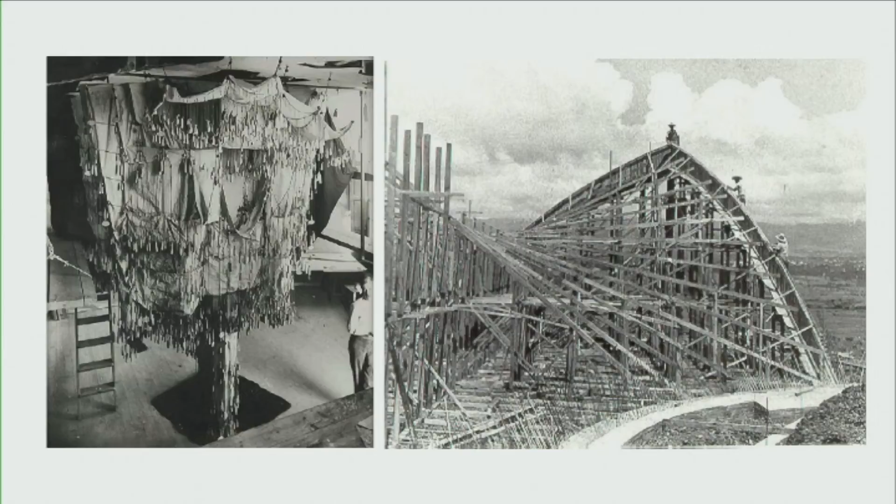So this idea of the impossible for me really starts with these two images. On the left is Gaudí's hanging chain model. The fascinating thing is Gaudí had an idea in his head, a vision, but he didn't quite understand how to describe or communicate it. If you approached it from a traditional architectural standpoint, you'd draw plans, sections, renderings by hand. But his vision didn't align with those methods, so he had to invent something. That's the ingenuity of design and architecture: you've got an idea, and you have to invent the way to document and communicate it.

The same holds true for Felix Candela in his hyperbolic structures. The beauty of that form is the method of construction that goes into the process. All of the ruling lines that define the geometry are actually the lines constructing the building. Very powerful stuff, this idea of a vision and how to begin communicating it.

Early in my career, as a young architect, I started out drafting by hand, ink on Mylar. At the end of an 8 to 12 hour day, your fingers would be covered with ink, sometimes for weeks. That's how people knew you were an architect—you'd meet people socially, they'd look at your hands, and realize it.

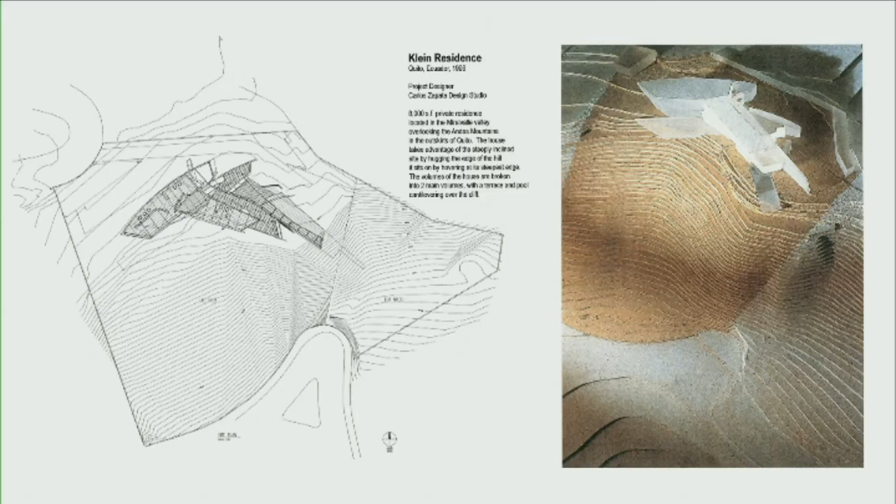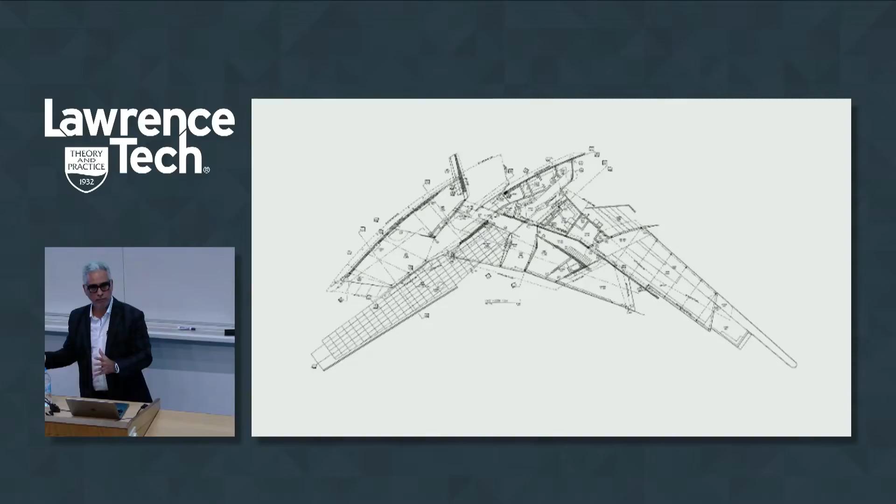But the interesting thing was the pace of the work. It was slow, it was deliberate. We took time to cut the contour lines of that model, to draw the plan, to build the adjacencies and the program, and to really visualize this in a way that today, with our tools and technologies, is fairly easy. So I want you to think about what we're losing from this process as we gain technological prowess.

So, a lot of physical models. This model was actually, in a lot of ways, our BIM back then—it was used in the field for construction. The tradesmen had to verify the measurements on this physical model. And this model was pretty huge, about twice the size of this table.

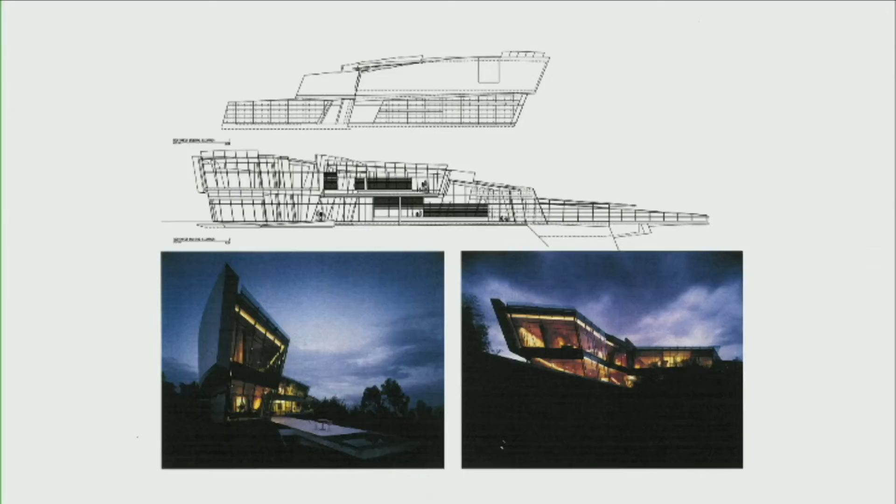But the project gets built, and that's always the exciting thing—that moment of actualizing the design into reality. That's really been the driver for me in my career: idea to hand to form to building.

In doing so, we had to come up with ways to represent these geometries. Here's a simple example of this staircase, where we had to do multiple cut lines to define the dimensions of the design. As a young architect, you could imagine sitting there drawing these things for hours, thinking, God, there's got to be a better way.

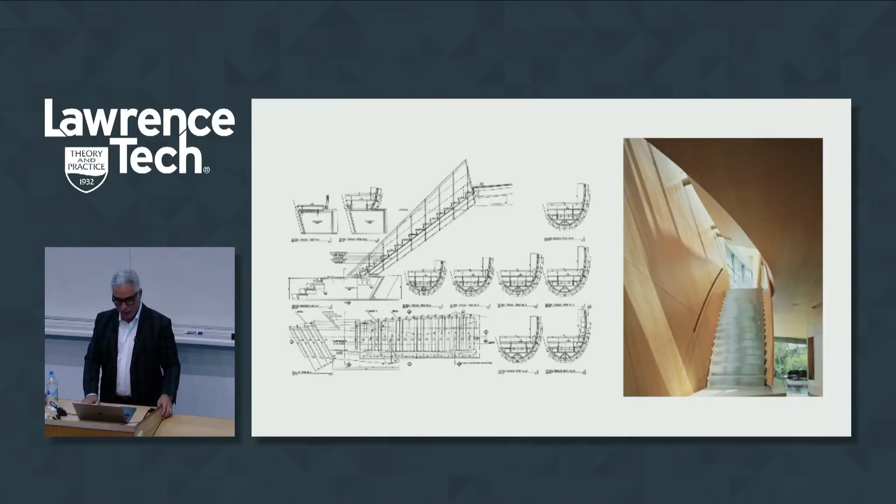That was the impetus for me to start thinking about new ways of working, designing, and using tools in a more direct way. That's what brought me to MIT, where the theme was really about new tools. I remember Carl walking in at 2 o'clock in the morning in the computer lab, asking me, 'Hey, what toy are you working with today?' I was always looking for the next tool to test out and use—it was interesting.

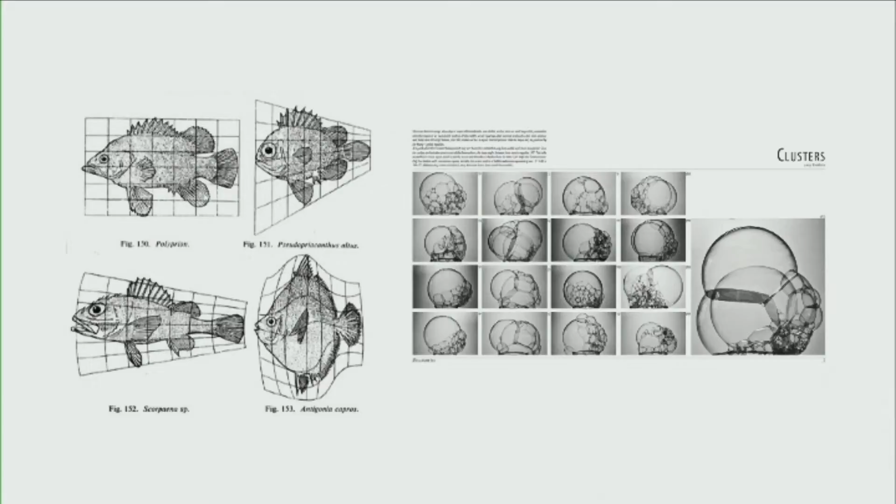But it was really about this idea of form and how we begin to think about it in different ways. On the left is the work of D'Arcy Thompson, and on the right is Frei Otto's soap bubble experiments. The idea here is figuring out new ways and methods to come up with form.

I was introduced to the computer in a different way, and began to look at simple things like how you take a sphere and morph it into a different shape, and what that implies in the design process. I began to look at Maya, Rhino, and other tools starting to come into the market that implied a different way of looking at architecture.

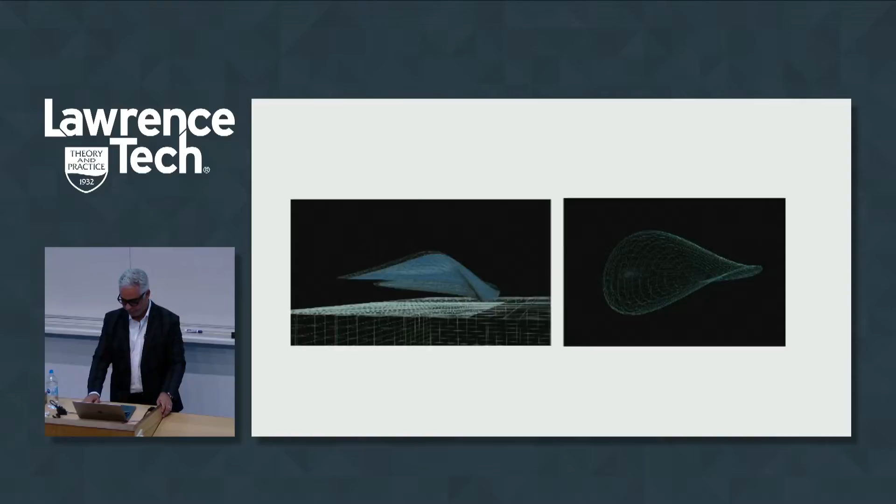That took me, for my first professional job as an architect, to work in an office implementing some of these strategies. The first project I worked on when I joined Morphosis was the San Francisco Federal Building. It was a design competition that Morphosis was awarded, and the whole process was really about the facade and the veil covering the building.

It was a building that was also going to be responsive to the environment. It had operable windows tied to the National Oceanic and Atmospheric Administration, which tracked the weather nationally and communicated back to the building. So the building was constantly moving and responding to the weather conditions.

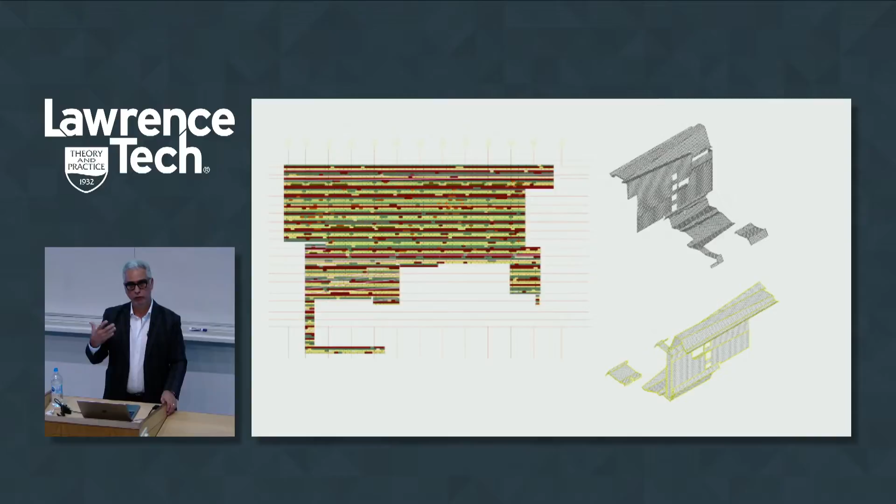So my job was really to look at that facade in a more integrated and systematic way, and how do we begin to document this for fabrication purposes? Coming up with simple ideas of how to use the computer to generate a strategy or method that we could then use to model.

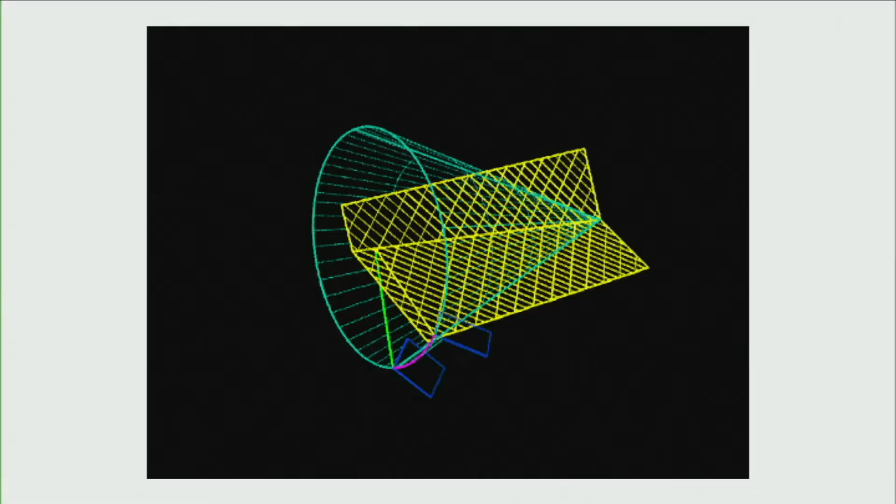569 varying panels with different folds at different conditions, then putting that into a production process in the computer so we can generate the documentation for it. Here's some examples of the model as it was for construction purposes.

The beauty here was that we were able to integrate multiple trades into one model so they can work more seamlessly. The facade itself had 3 different layers with 3 different vendors or trades with 3 different contracts, which created a communication challenge because those 3 components had to work together, not just geometrically, but also contractually and for construction purposes.

The next project where we further developed some of these ideas was the Eugene Federal Courthouse, where the idea was about a ribbon that wrapped around the building, encompassing a number of courtrooms.

The intent was that as these things peeled off and folded, it needed to seem as a seamless flow of metal. So again, how do we begin to document this information and integrate a lot of these ideas through the computer?

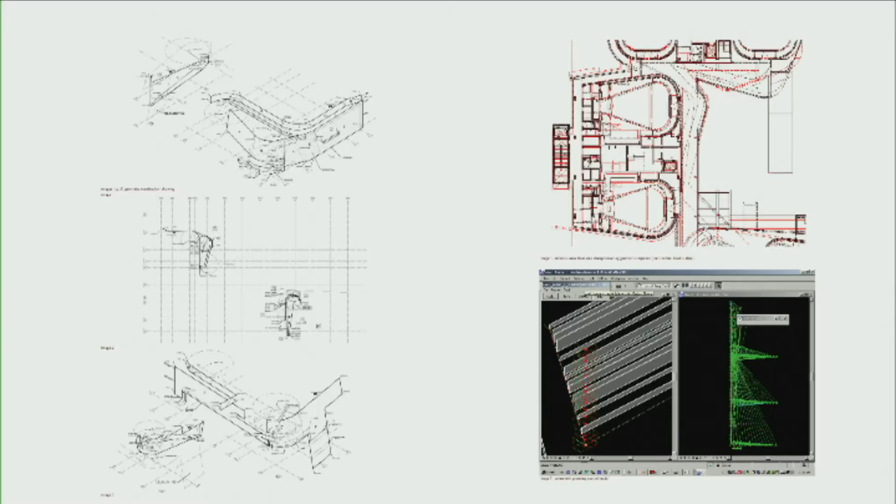We began working with Robert Aish, who was a researcher at Bentley at the time. We were using Bentley Triforma, a modeling tool very similar to Revit and CATIA. But one exciting thing was that Robert Aish was starting to develop a visual programming tool called Generative Components. It's the precursor of Dynamo.

I don't know if you guys know about Dynamo or have used Dynamo in Revit, but Robert Aish basically invented the whole idea of visual programming for architecture.

So we started to use that, and it was really interesting to see the relationship between the image on the right, the little bubbles which is the narrative, and on the left, the geometry. So you've got this direct correlation between the script, the program, and the responsiveness of the form.

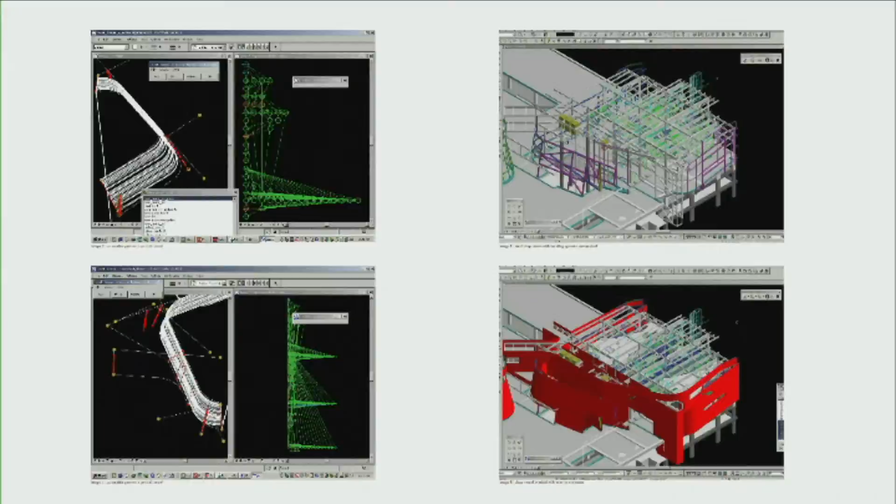And then obviously bringing that all together again into this master model process of integration. That notion of integration, you're gonna hear me say that a lot in this talk. It's a very important component in terms of how all of the different disciplines and pieces come together.

That then led me to Gehry Technologies. While at MIT, Frank Gehry was commissioned to build the Stata Center, the School of Computer Science at MIT. While he was there, he and his partner Jim Glymph conducted a number of studios and workshops, and I was able to work with them on some of those studios and got to know them, got to know Jim Glymph really well.

So my goal at that point was I wanted to go and work with Jim Glymph. He was, at the time I think, the only architect talking about technology in a completely different way. So it was really exciting when I got the news while I was at Morphosis.

It was interesting because Morphosis and Gehry's office were literally just around the corner in Santa Monica, Cloverfield and Colorado. Lunchtime was hilarious because we'd all meet at that corner, and the Gehry guys and the Morphosis guys would all go to lunch together, and we were all friends and talked to each other.

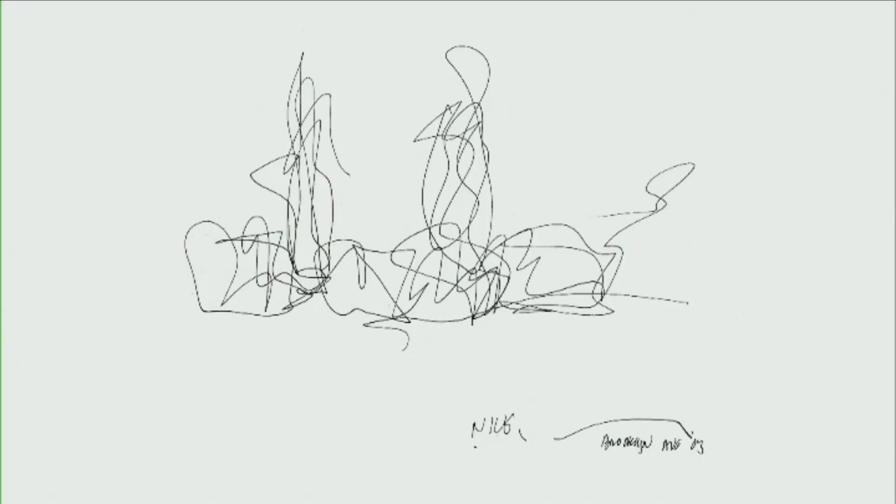How do you take a sketch, a gesture from an idea like this from Frank, and begin to develop a whole process of design that leads you towards the resolution of the project? What people don't understand about Gehry is that he's very disciplined in how he works through his design process. People think the form comes first. Actually not—it was the program blocks that began to form the body of the building. Until that was dialed in, Frank would then begin to do the gestural moves on the skin. But this was a very important piece of the process.

Lots of iteration, lots of physical models, and then eventually the final design model—the master model, if you will—that would then become the template for the basis of production.

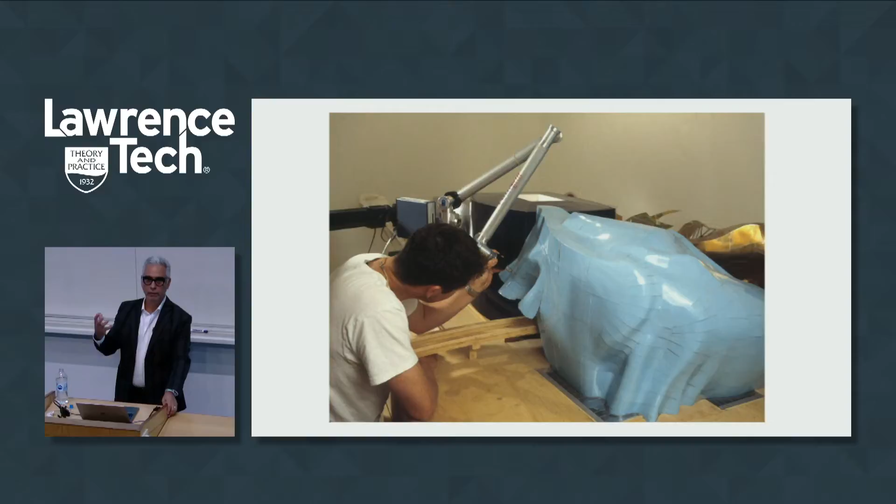And so here you have the digitizing arm collecting all these points to begin to document that design, so that we could then take that into CATIA to start developing all the detailing and the engineering for the construction.

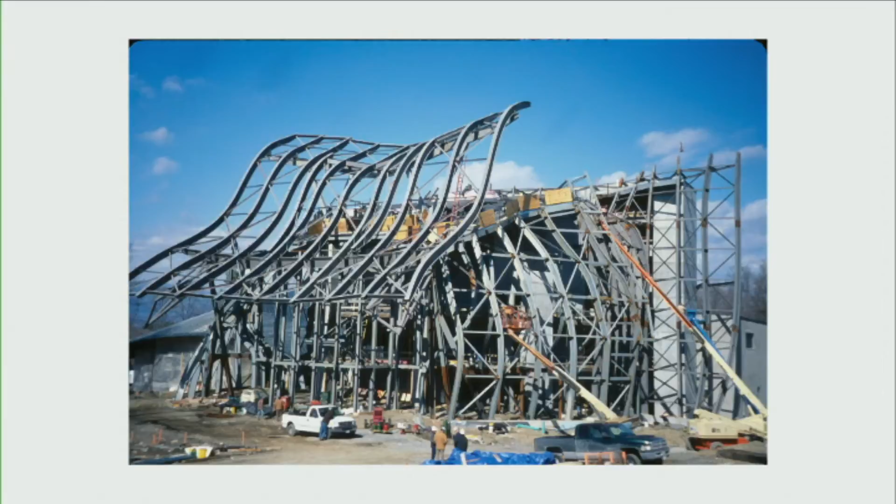It's very simple—it's going from sketch to a computer model in a very rigorous way. And we learned how to do that in Frank's projects very effectively.

And as we saw, the Disney Concert Hall was like the little cousin of Bilbao in a lot of ways, because a lot of the ideas generated for this project came from that.

So Gehry Technologies—it was an interesting group of people, architects, computer programmers. We put together a very diverse, multidisciplinary, creative group of technologists, scientists, programmers, and engineers, and I believe it became the first, or the model, if you will, for the BIM service business.

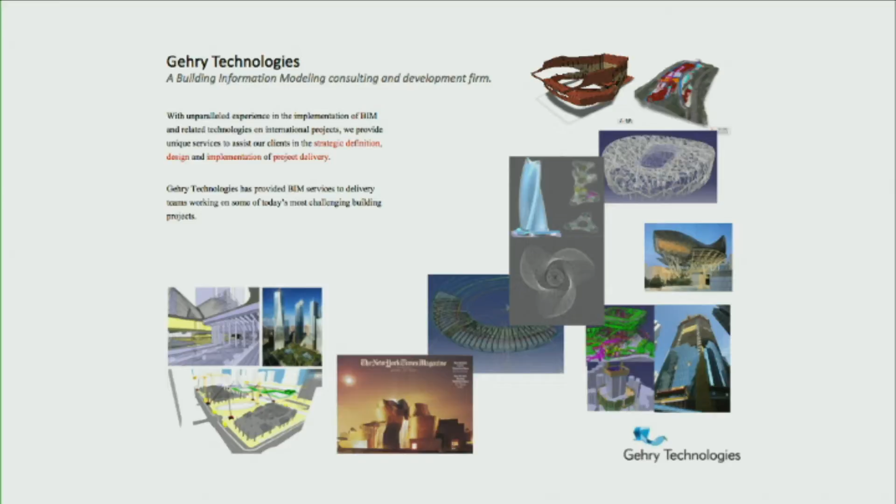After Gehry Technologies, a lot of companies began to do the same thing. One in particular, a group out of New York called CASE, was probably one of the most successful that grew out of that, and just recently got bought out by WeWorks. So now WeWorks has an internal group that is literally driving the delivery, design, and integration of their projects, which I think is pretty brilliant.

But the whole focus of Gehry Technologies was, now that we've done this on Gehry projects, how can we begin to provide this service to others? So we went out to the world and began to provide services to the younger architects who were up and coming—the Zaha Hadids, the Herzog and de Meurons, the Hani Rashids—who had ideas and visions but didn't yet have the methods or processes to execute them. That was an exciting moment in my career, where we could begin to share this knowledge across the industry.

One of the mantras we had—and it was actually Frank who came up with it—was that his whole drive in doing this was to transform the industry. He wanted to give power back to the architect, give control to the architect. He always said that he or she who owns the information has the power. And that holds true today. I think that is a really important thing to keep in mind as you think about technology.

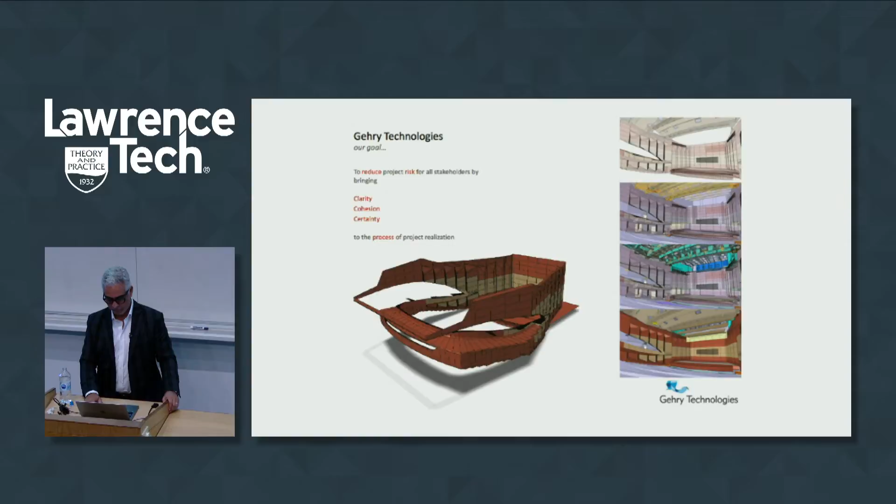So here's a project that, in my opinion, is probably the pinnacle of this whole integration of building information modeling and computational design, where a lot of these ideas culminated in a very beautiful, productive, and effective way. This is the Louis Vuitton Museum in Paris.

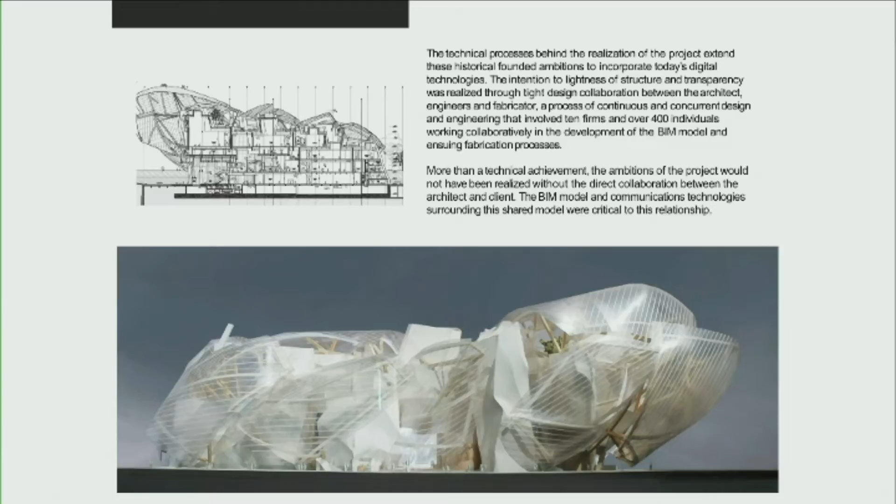But the thing I really wanted to focus on was more about the process—how we were able to combine the parametric modeling we were doing with new ideas of collaboration and new tools, really coming up with a structured way for collaboration. Nobody had done this before. There wasn't a Navisworks or a BIM 360 or anything like that at the time.

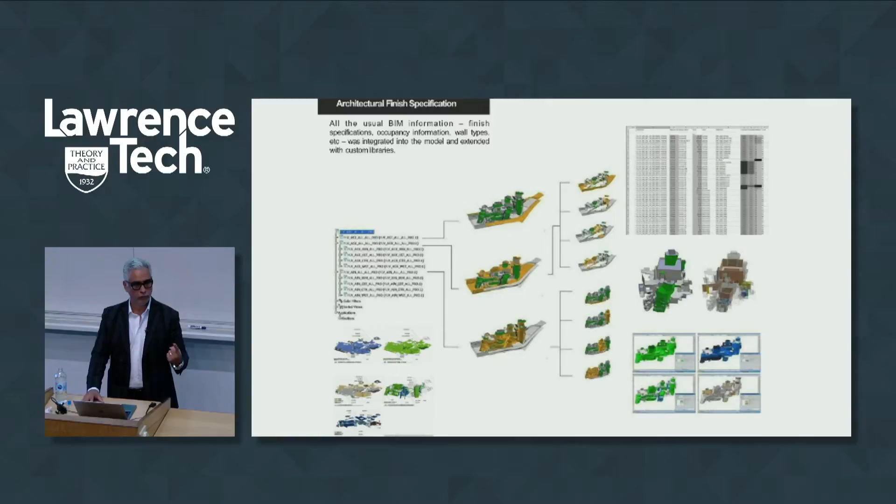So we literally had to begin to think about really simple things like interoperability. Everybody's using different tools, everybody's using their own methods—how do we begin to bring these things together effectively? How do we begin to think about all the different scopes of work as different components that need to come together in a way that brings all this information into one single source of truth, being the information in the model.

So what you see here is us basically attributing that information in a way that we could then effectively schedule from it, estimate from it, and integrate from it.

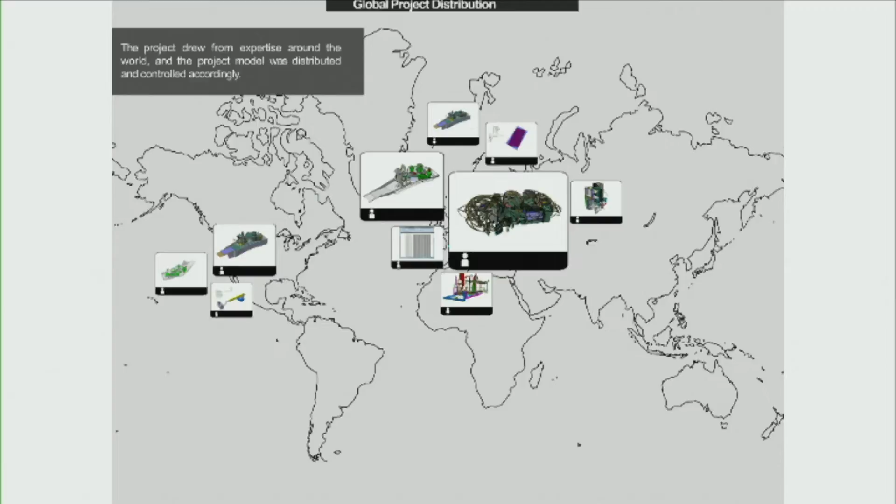And so we had to create literally an intranet, if you will, of the project, because we had consultants throughout the whole world working at different time zones and geographic locations. So we developed our own model server where the centralized information was constantly being updated, so everyone had concurrent real-time data of the project. And then we created a tiered access to that information depending on your role and your persona.

And then, again, how do we then interchange this information and exchange it with everyone? We had to come up with a method of doing that. We were inventing literally a way to collaborate through the model.

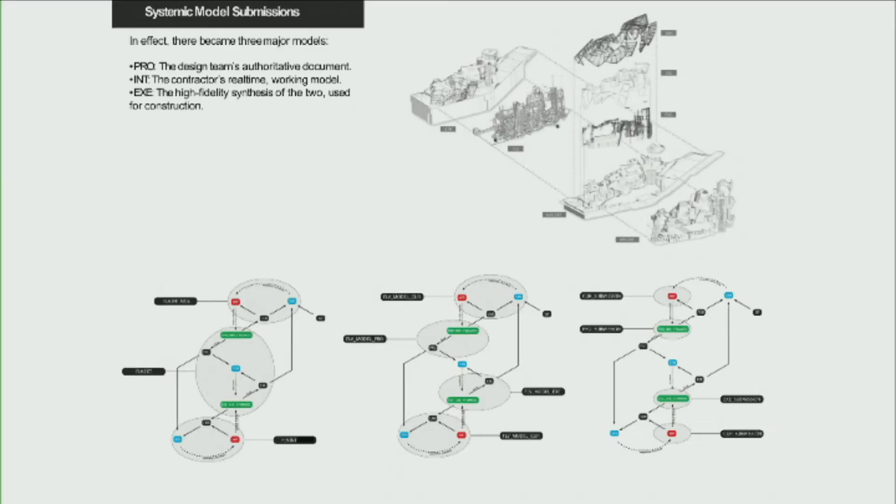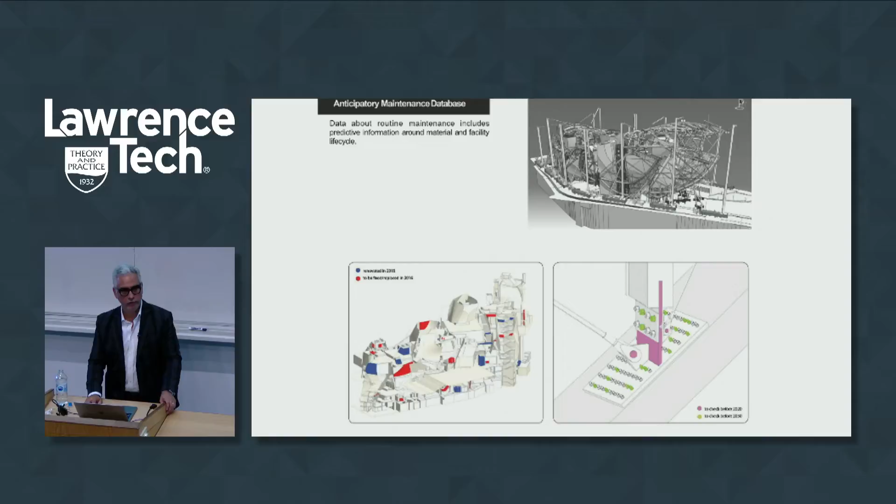Data aggregation, data distribution, how do we then leverage this for other functions like visitors, security? There's a lot of information being captured and knowledge. The important thing was how to democratize that and share it with others, and maintain a database as well. So this model now really becomes more than just a representation of the design.

So I'm going to kind of go quickly through this. Are you guys okay? Everybody with me so far? Not getting sleepy? I know it's late in the day.

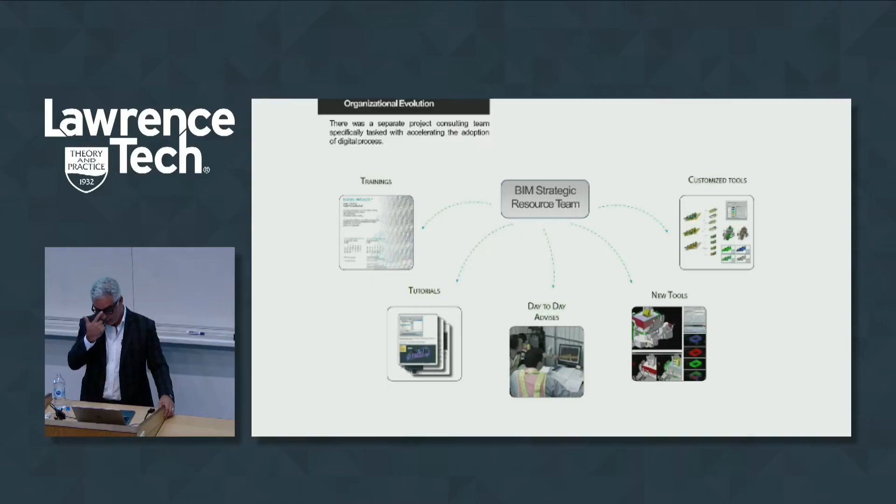Part of this too is the training. You have to train people. Nobody knew how to do this. So not only did we have to execute and implement, we actually had to introduce a whole project team to a whole new way of working, new tools, new processes, and constantly updating the guidelines and standards so that everyone kept focused and on track.

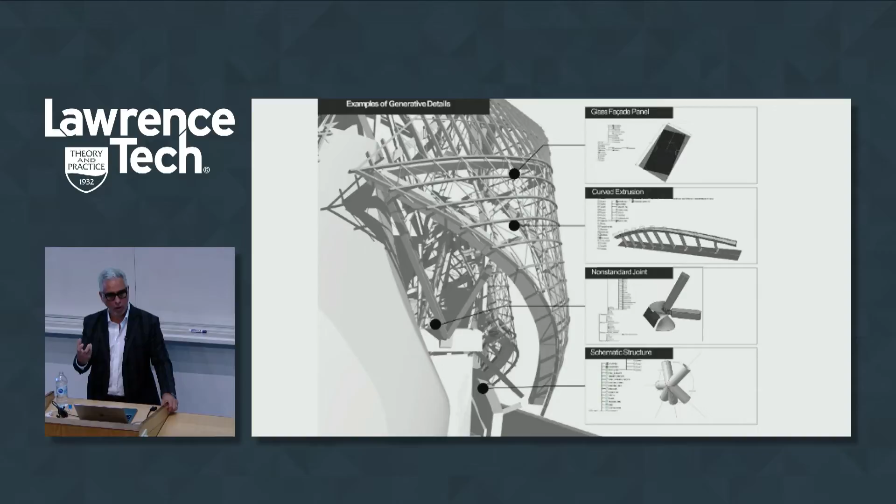And then generating a lot of intelligence in the componentry and in the development of the design. These are very unique conditions that varied from joint to joint. Capturing that knowledge in a parametric model and then being able to deploy that effectively, and then rationalizing that for fabrication, going straight from digital to the factory.

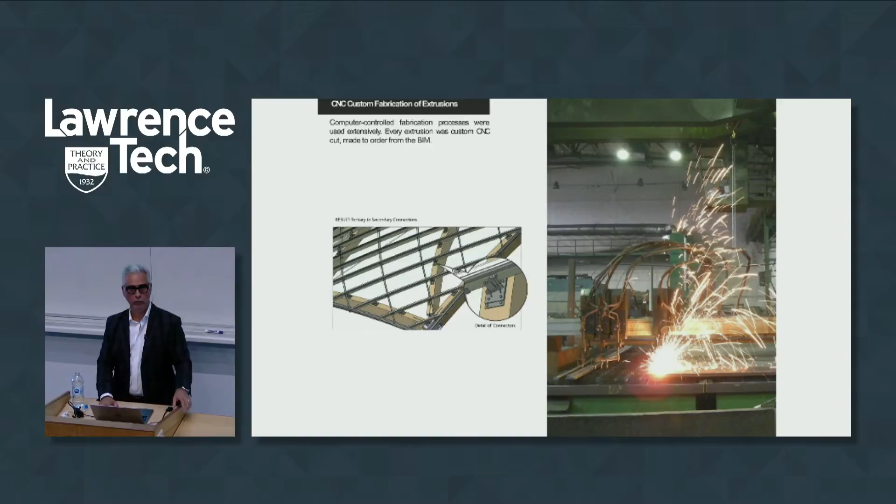And then optimizing the material. One of the challenges we had was how to make a complex curved building economical. So what we had to devise was a way to generate these curves from a single curved surface, meaning conical. If you can just bend glass in one direction, it's much more cost effective than if you bend it in multiple directions. So we had to devise a way to control the geometry with computation.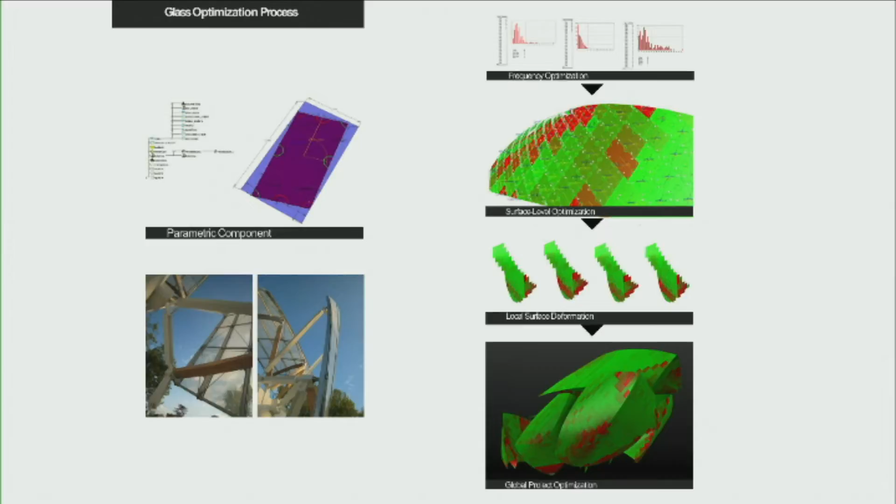So we ran this iteration multiple times so that the red would go away. And if the red didn't go away, but it was just one panel, then we could live with that. That wouldn't be the end of the world. But it was a matter of reducing that process. So here's a diagram of that workflow where you're going with the geometry all the way through the parametric definition and then the documentation.

Here's another project where we took all this knowledge to somewhere else, where you would think there's no way you can capture this level of sophistication. This is Mexico City. This is a museum where we were hired by the architect, Fernando Romero, from FR-EE, to panelize this facade with a hexagon.

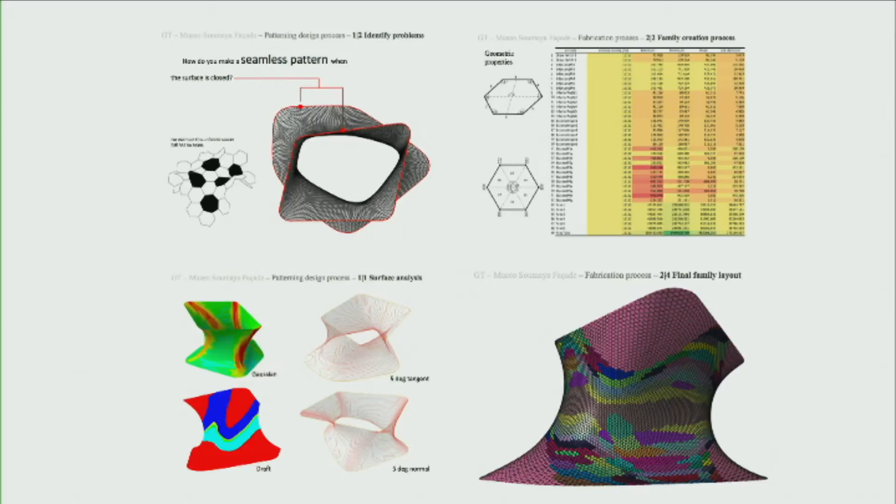The challenge he had was that he had locked the shape because he had to buy the steel early. So now he's got this shape that we can't change, and we have to panelize it with a hexagon. Initially the idea was it's got to be one hexagon pattern, which is impossible on an irrational shape. So part of the process was to educate the team on the complexity of the geometry.

So we showed how you unfold a soccer ball, and did a lot of academic exercises to show the complexity that was created here and what the challenge was. We had to write a script literally that constrained the gap to a certain dimension within a tolerance of 3 inches, and then optimize the number of families or groups we could come up with, so that we could reduce 14 variations of this panel versus 2,300. I knew this was going to happen.

Sorry about that. There we go. My apple.

So where was I? I'm sorry. The variations down—so we were able to control that and optimize that.

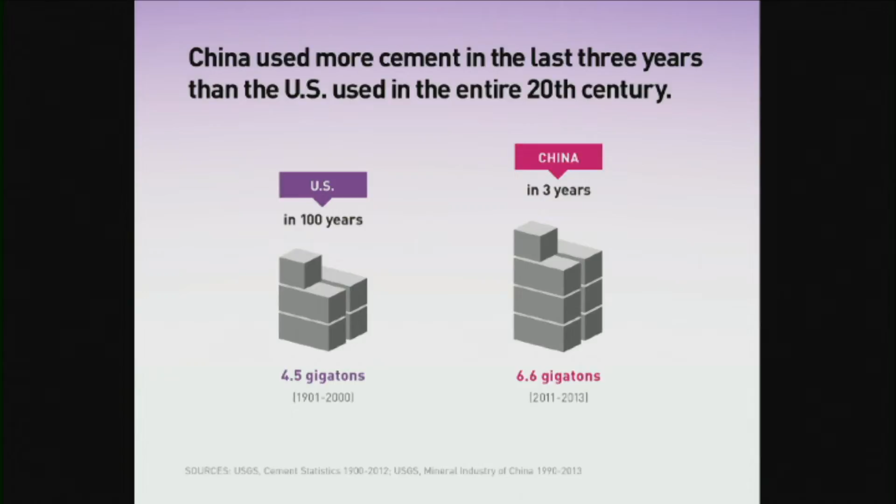This also in the face that China, and I think it's true to this day, is going through tremendous amount of growth. This data point was really interesting, and it's quite dated, but I think it's still relevant: China in 3 years actually used more cement than we did in 100 years. I mean, think about that.

I mean, we were a very complex organization. A Disney project had over 140 disciplines that needed to come together to build the project. It wasn't just the facility guys or the MEP guys or the guys that we think about in a traditional construction project. It's show designers, theme, animatronics, ride engineers. The list goes on and on and on.

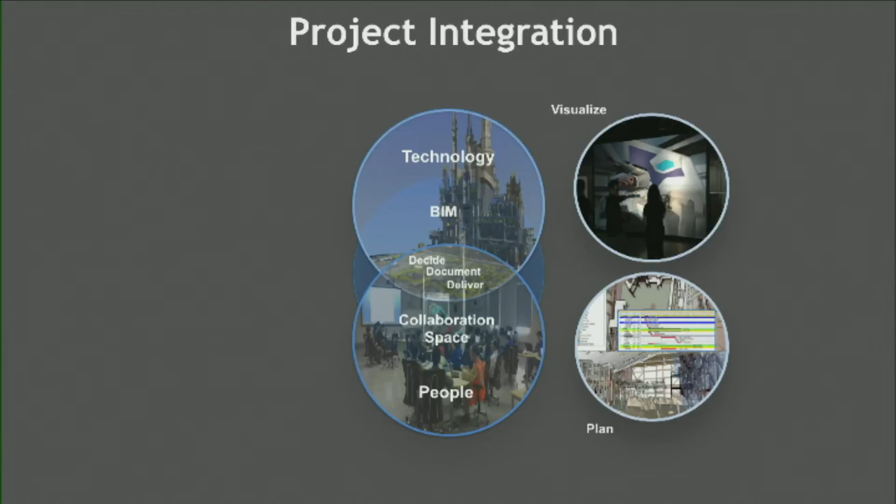We linked our schedules to the models, so we did a lot of visual planning with 4D, and then implemented that in the field—how do we take that information and begin to communicate it more directly out in the field using total stations, robotics, iPads, and then verify that everything was being built according to plan, which we did through laser scanning.

And so this was the iterative cycle, the day-to-day grind if you will, of bringing all of these pieces together to the stakeholders. The stakeholders had to come in and make decisions and tie their decisions to the model, to the schedule, to the estimate.

This is not a new idea. We actually got this from Stanford, the Center for Integrated Facility Engineering, who actually got it from JPL in Pasadena, NASA. Basically, this is how NASA launches their missions.

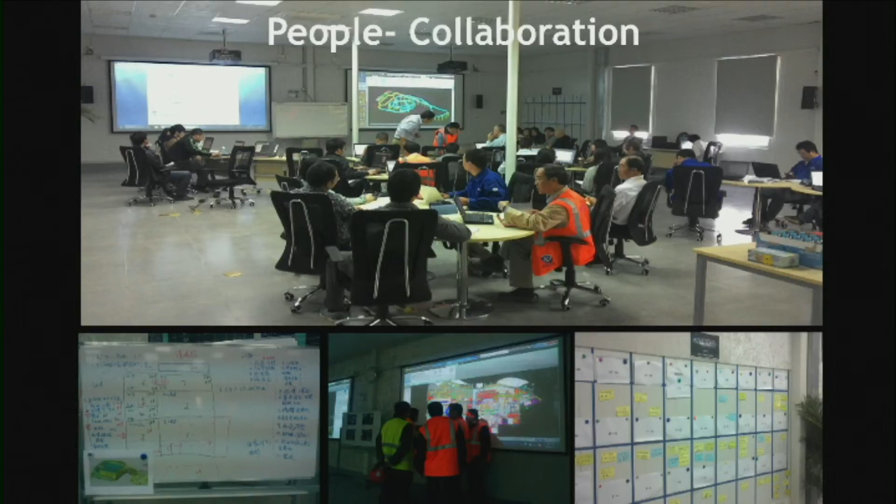They bring everybody together into a room, and they're constantly working and talking with each other, communicating, making sure that everyone's in tune with every decision that everyone is making. There's a great book out recently by a general, I forget his name, called Team of Teams. Highly recommend it. I think it's really relevant to a lot of the stuff that we're facing in construction as well as in other industries.

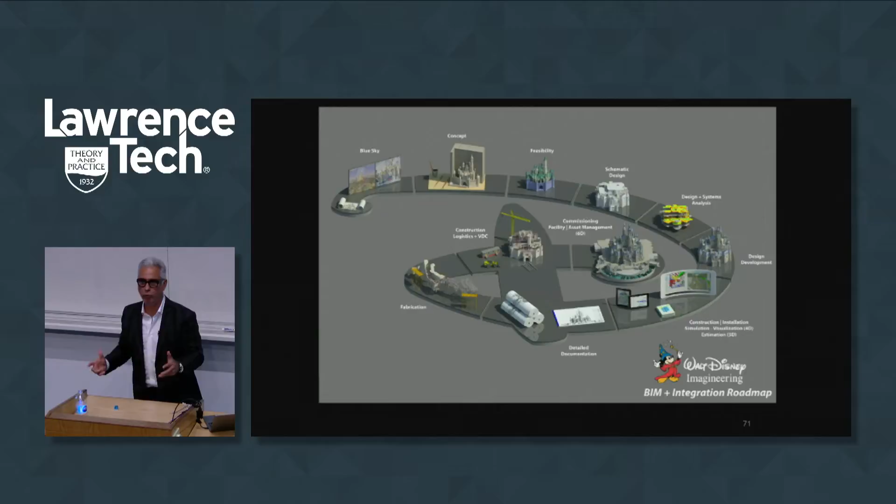And then using BIM and technology and the tools to bring all the different multidisciplinary stakeholders into one single source of truth and mapping that out into this roadmap. So from that project, we were able to then develop the roadmap that we were then going to use and implement for Walt Disney Imagineering.

And we taught the Chinese market, we taught our own people, our Imagineers. One of my initiatives was to try to get the regulatory agencies in Shanghai to understand the value of what all of this meant. And we were able to do that. They put a program, a plan, a 5 to 10 year plan where in the tourist zone where Disney sat, all projects from 2013 on that were above a certain price were going to be required to have a BIM submittal for regulatory submissions. So we educated the municipalities. We took them to Singapore to meet the Singapore government, who had been doing this for years.

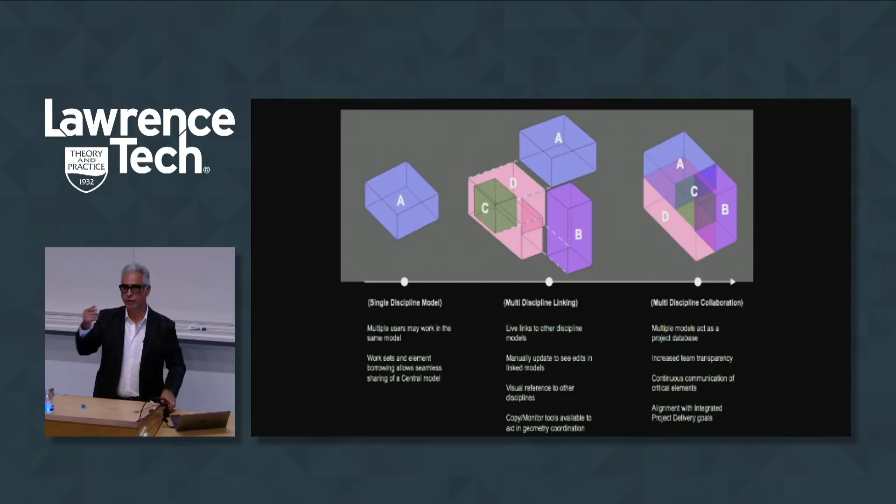They've been doing e-submissions and BIM submissions in their building departments way before anybody had even thought about this. And the reason they do it is because it's by necessity. Land is limited in Singapore, so they have a very rigorous process to make sure that their planning is done effectively.

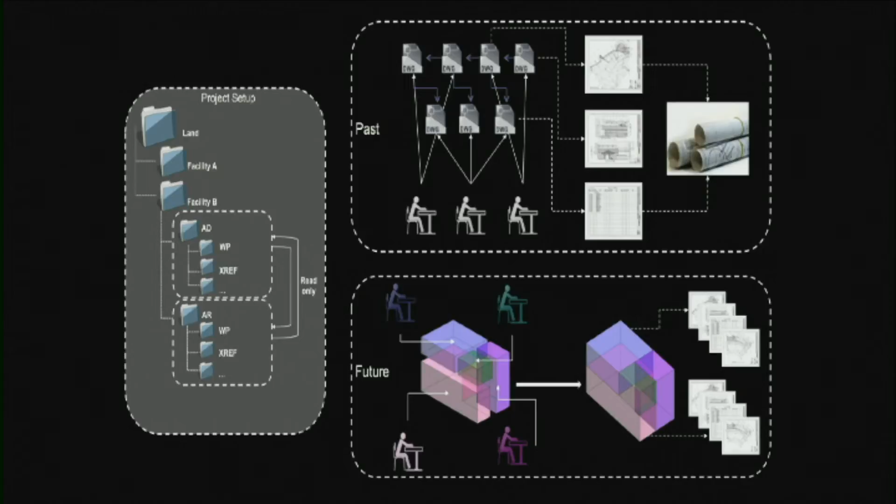So mapping out the whole BIM process, we start to organize how we organize the information, get away from a paper-based process and start thinking about this multidisciplinary 3D-based process that then outputs the 2D information, rather than having it the other way around. And then there's the level of detail as you go through different phases of the project. Blue sky for us was our conceptual phase where we're just sketching, it's just massing. And then all the way down to operations, where you've got to have the bolts and the washers and all of the information that the maintenance crew is going to need to be able to verify and maintain the facility.

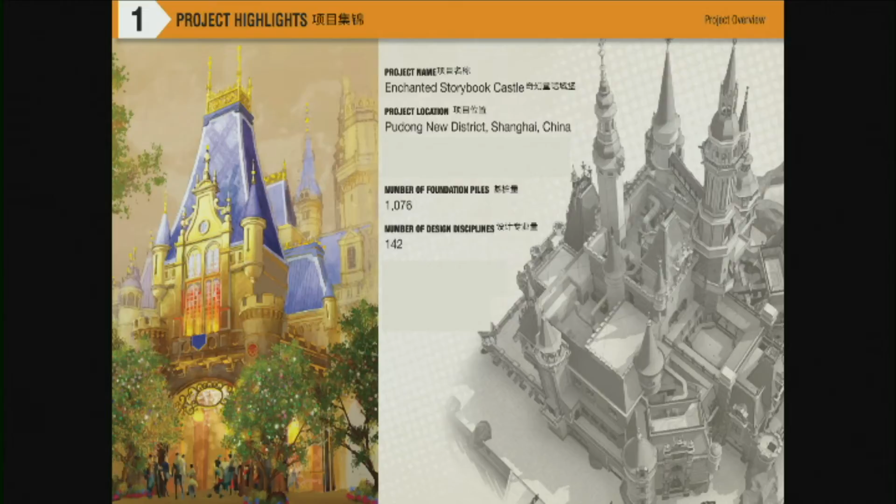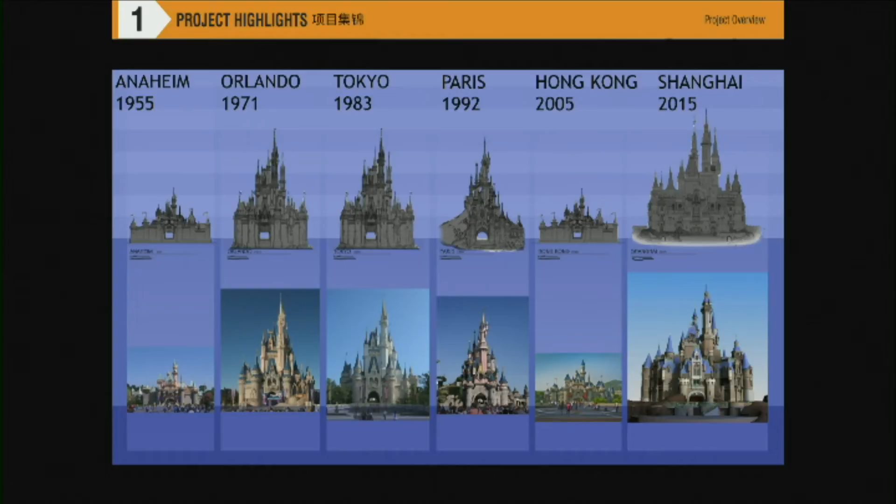So the project started out in 2D and in watercolors, in a typical 2D-centric way, and there was a lot of resistance to change. The organization had dabbled years before I arrived with Revit, and they didn't have a good experience. So I insisted that we try to use a tool that's different from just a legacy process like AutoCAD.

And we went rogue, me and this young architect, and we kind of did a parallel process behind the scenes. Got a little bit in trouble for it, but I think it paid off, because when we got the creative director of the project to stop going through the AutoCAD DWGs just to make sure that all of the information he was envisioning was correct, and instead visualize it in an authoring platform like Revit in 3D, it completely changed his perspective on the way he was working. And once you get the creative guy at Disney to support you, then all the decisions from there are quite easy.

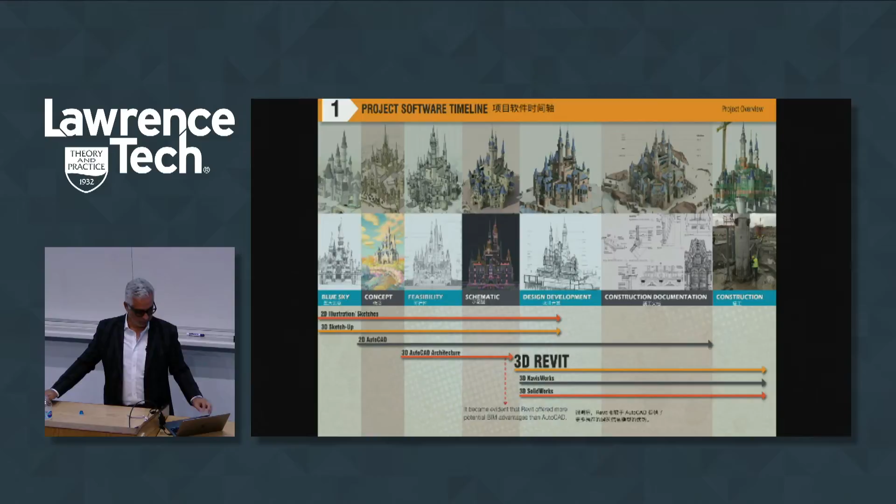One of the things that we then started doing was leveraging the power of BIM. This castle was filled with ornamentation and componentry, which is very typical of a Disney project. So we started developing a library of intelligent components that could then be attached to the project.

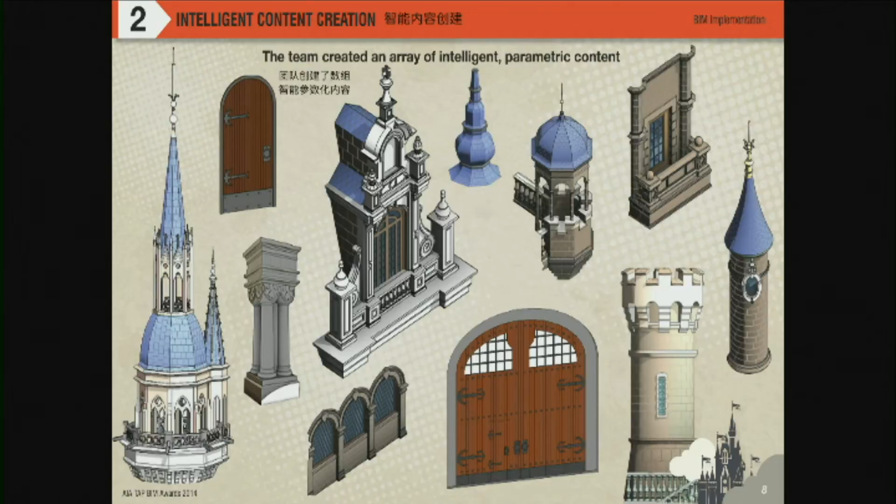That gave us the ability to kind of treat the castle as a kit of parts, right? So now we could track all these components. We can track who's building what, when are they going to be built, when are they going to be delivered.

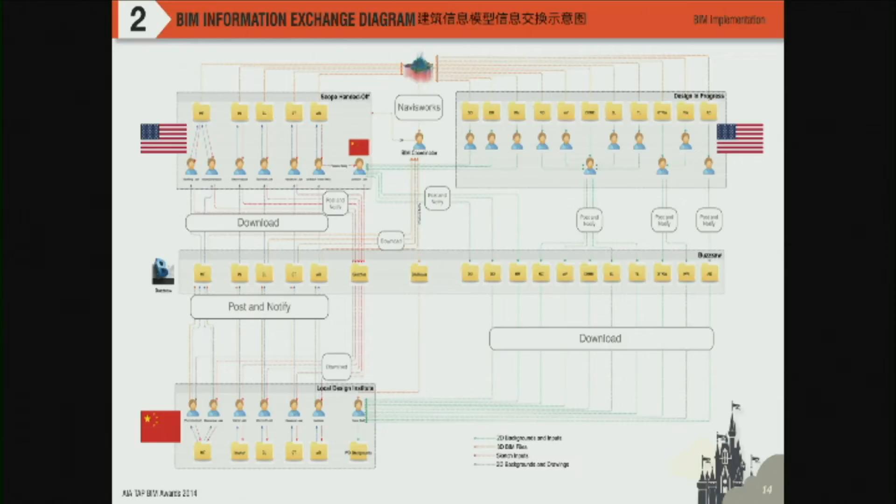Communication, the collaboration between different teams was also important. We had a creative design team in Los Angeles, a delivery team in Shanghai, and had to figure out the information exchange process between us and them and how we were going to do this effectively.

Some of the advantages of using this process on the project was parametric modeling. If you were just drawing this in 2D and had to make a change, like we had to do in the atrium way into design, that could be done quickly in a parametric model that would automatically update that information. That saved us a tremendous amount of design time and design breakage, if you will.

We were also taking some of the ideas that our artists were developing, because these were artists who knew how to do stained glass windows and had been doing it their whole life. The guy working on this was a mature architect, designer, artist, who had never used a computer, and was basically drawing all of the windows by hand for the project. So we got together with him and started capturing the rules he was using to develop the design.

We were able to show him, look, you have designed the rules of that window, and now we can spit out thousands and thousands of iterations. And he thought it was like a kid in a candy store. This was like the most amazing thing he had ever seen.

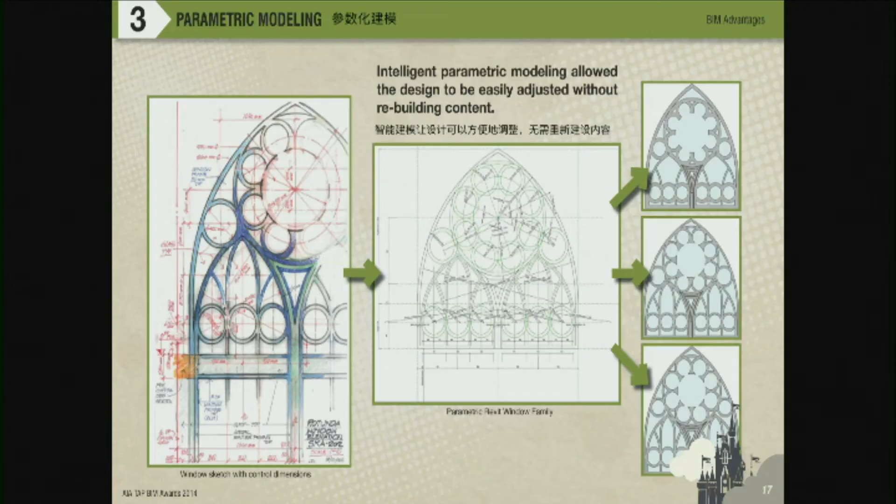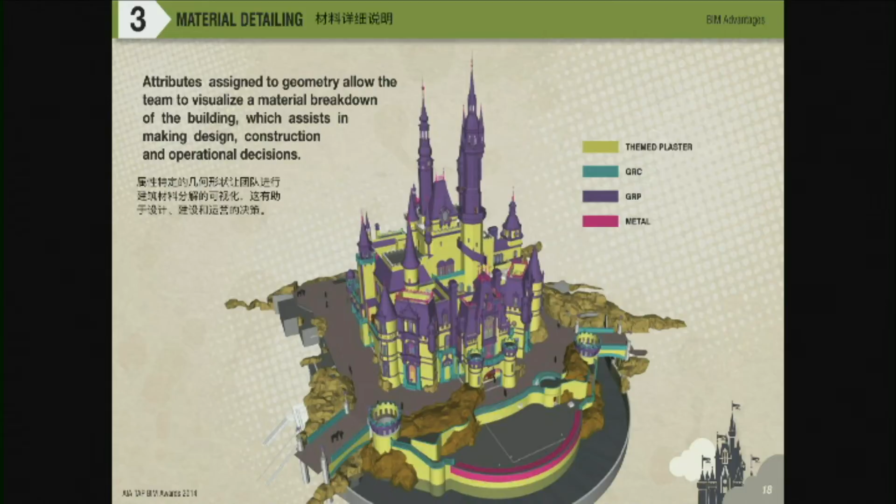Then attributing the model for the regulatory process so that we could determine the different materials and the fireproofing for the project. As you guys know, the fireworks are launched right above the castle. It was a big concern. The Chinese regulatory agencies didn't quite understand how this worked, so it was a good way to communicate this information, as well as traffic control and flow.

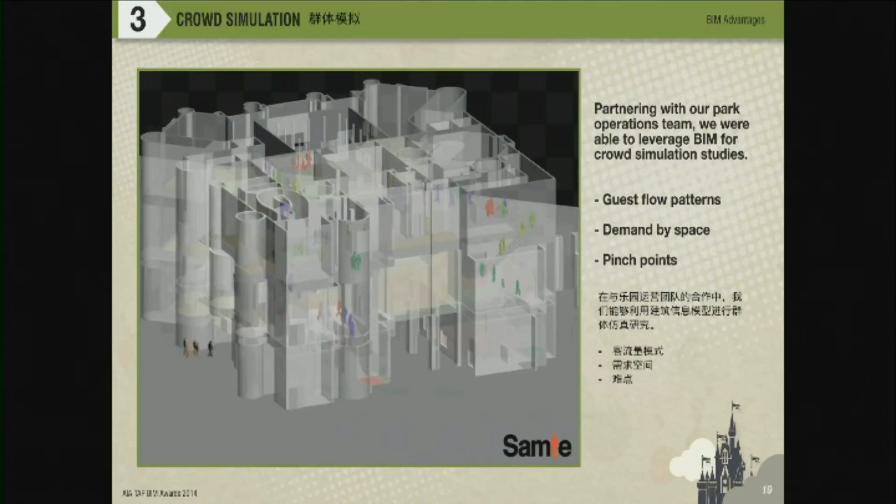We started partnering with a research group at Stanford where we began to look at guest flow, parking, and crowd simulation in the castle, because it was going to be the first castle to be inhabited. From this, we were able to analyze more effectively the demand for the space and certain pinch points that we discovered early on that we were able to change.

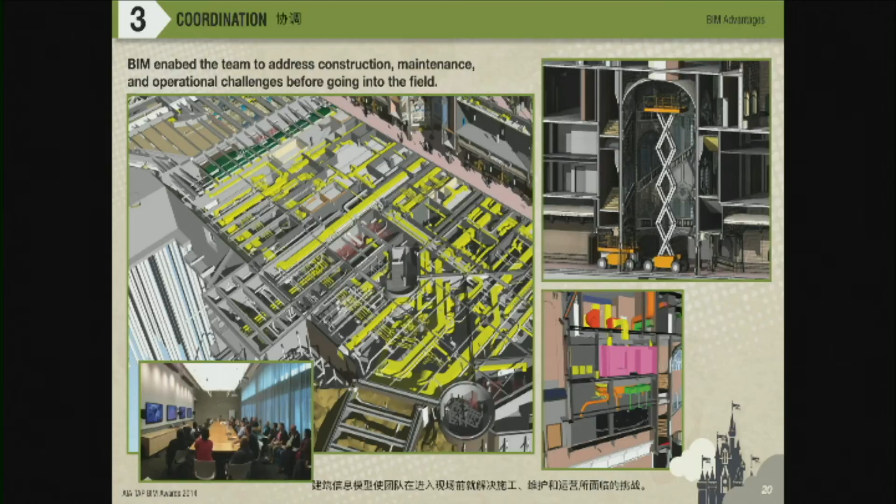One of the unique things about Disney projects is that our facilities and operations people are actually part of the design process. So as we're designing and developing the project, they're giving us input, and they can very quickly tell us, how are we going to get a JLG lift so that I can change that light at the top of the atrium? Oh, I don't know, let's find out.

So we bring a JLG lift into the model, and it's a whole new way of communicating and working with people that are not necessarily in the model all the time, but need to understand what's going on. And then the immersive aspect of what Disney does is very important.

A lot of virtual reality, a lot of visualization, immersion. Here at the bottom left we've got one of our chefs who is going to be in charge of the kitchen. Very quickly he was able to determine if the layout was going to work for him. We did this a number of times where he would come in and give us guidance in terms of what was working and what wasn't.

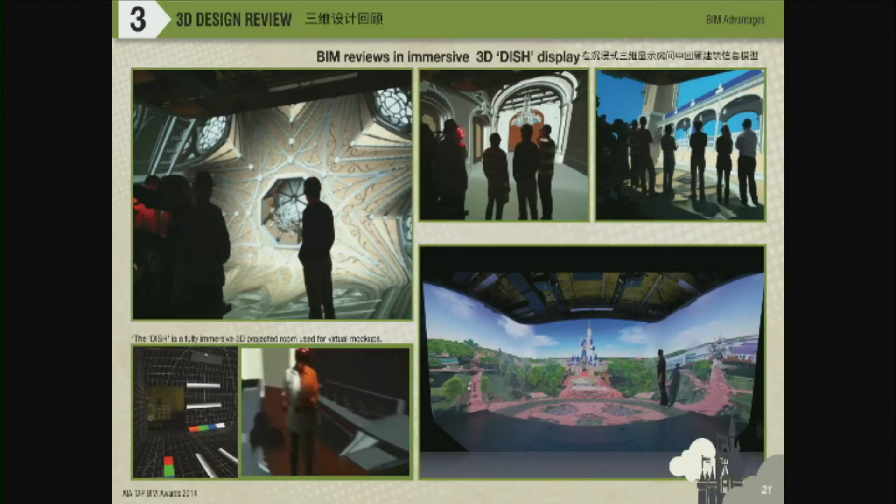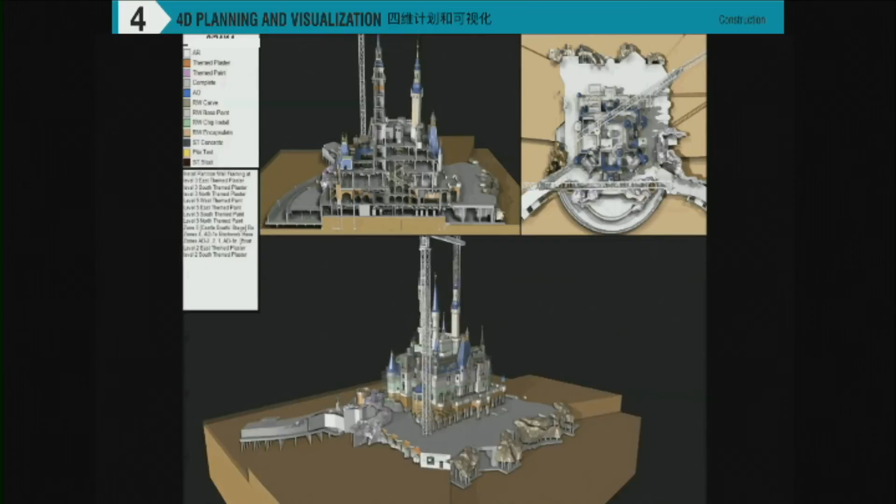Our construction schedule is now linked to that model, and we were using the 4D platform called Synchro really to design with. Disney projects are really not so much about the level of detail, but about the sequence of the work. So using this tool as an orchestration of how the work was going to happen was really effective.

And so here you have some of those outputs as we began to coordinate and sequence the job, incorporating all of the temporary works, the scaffolding, when each piece was coming in, when was it going to be painted, etc.

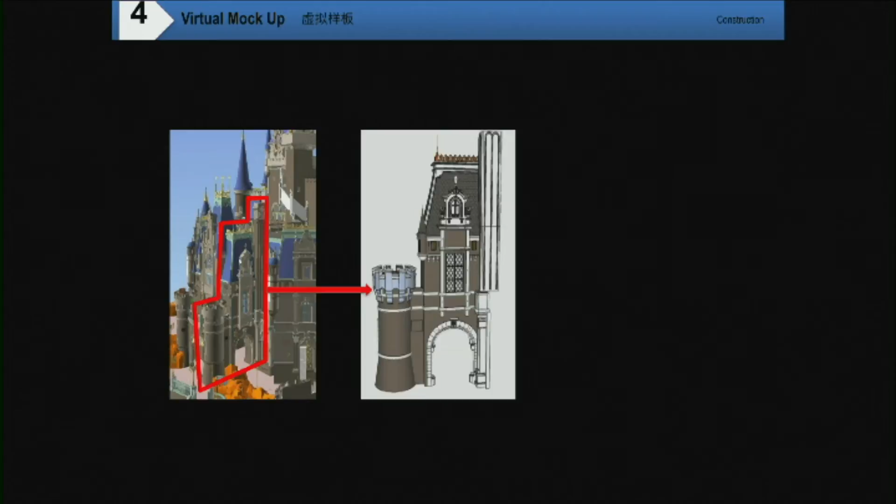We used a lot of virtual mock-up processes where we took components from the model that were used to work out the interfaces of these details and how they were going to come together, and then teach the craftsmen how to do that. This has never been done before in China.

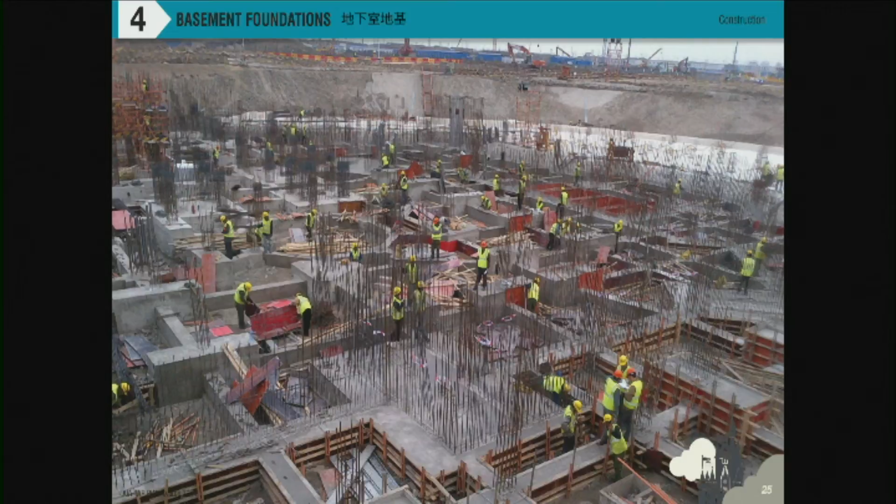So taking the digital to the physical in a very direct way. And then 3D scanning, constantly doing as-built verification, making sure that everything was where it was supposed to be. And then some of the images of the construction. This is the basement footers of the castle.

I also wanted to share this: there's the castle, very traditional, very picturesque. And then there's Tomorrowland. The castle is the centerpiece of Fantasyland, where all the princesses and all the fantasy characters live. Well, Tomorrowland is about the future. And the future looks like this.

And this is how we began to think about a whole integrated creative workflow for this team. We wanted to do something new, something unique that had never been done at Disney. And so we created a BIM process for the creative team, not just for the construction team.

Very intense creative process, a lot of renderings, a lot of imagery, a lot of studies. We worked with Grimshaw Architects who designed the canopy for Tomorrowland.

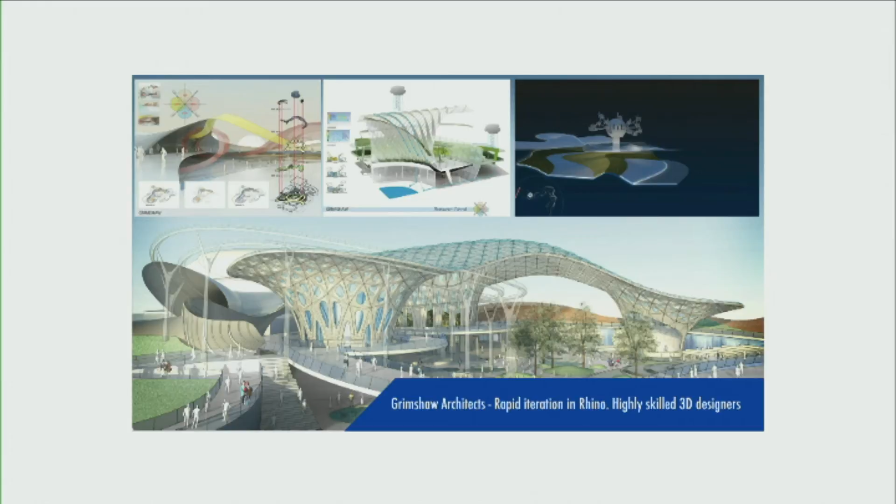So this was an ETFE covered space frame canopy that sort of covered the concourse for Tomorrowland.

Some early sketches in Rhino to kind of visualize the organization of the project, more sketches, iterating through a whole series of forms for the canopy, and then landing on this as our final design.

And the orange there is actually the track of the roller coaster. So this is a roller coaster that launched out of the building, went under the canopy, and then came back into the building, into the gravity box.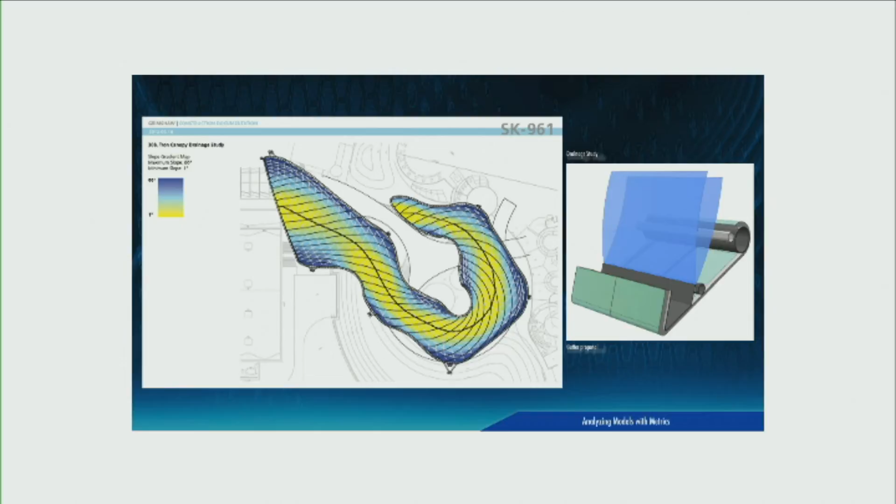And then going straight into production. How do we begin to analyze these models for drainage, for maintenance, for the details that actually needed to work.

Maintenance and accessibility was also important, so a lot of analysis with the operations team to see how we could reach certain points on the canopy, and then detailing out the gutters. The gutters were a major component of the design, very complex, very important.

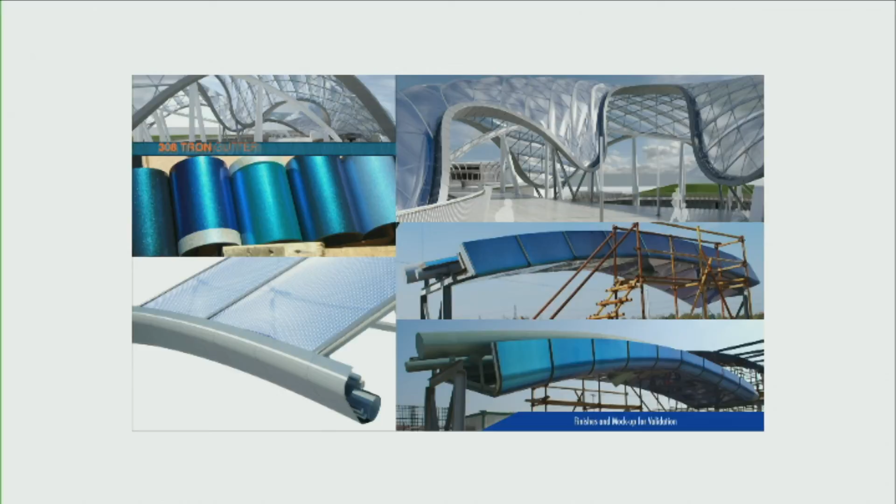And then going straight to fabrication from the design model, and some of the images of the construction team and renderings of the interior.

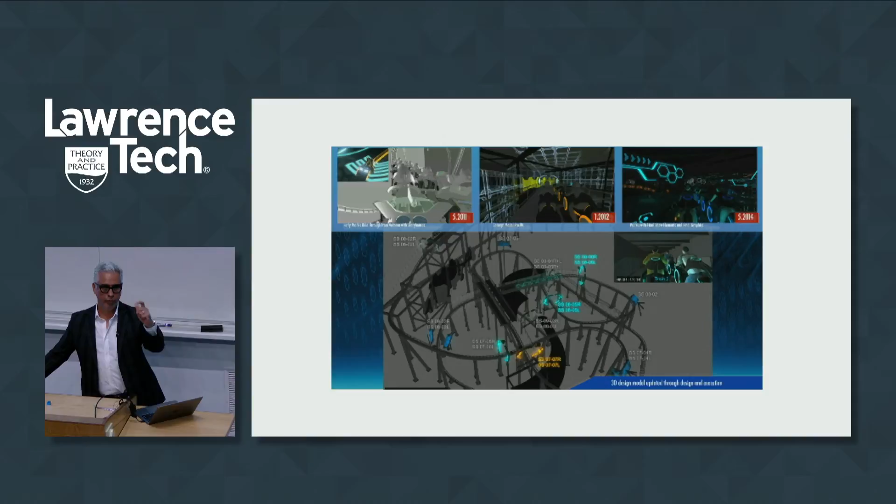And then the tools were also used very effectively in terms of analyzing the eye-to-visual position and the speed of the vehicle. These were cycles, so you weren't sitting on a car, you were actually riding a Tron cycle that then launched you, so you're literally floating on top of this Tron cycle as you race through the facility.

And so that leads us to Mortensen. This is the last chapter of my presentation. I called it Innovation with a Purpose, because all of this stuff that you've seen up to now has been really design focused, creative focused.

For me, it's been really exciting to have been in this VDC role early on in my career as an architect, then working for the owner and really understanding what that means from an owner's perspective. So I figured in order to complete the circle, what would that be from a contractor's perspective?

So now as the director of VDC here at Mortensen, it's really about the technology and how do we leverage technology for operational efficiencies, operational excellence, bringing greater value to the customer, and really increasing our productivity and our efficiency. So as a builder, the demands are different, and the challenges and the risk factors are different.

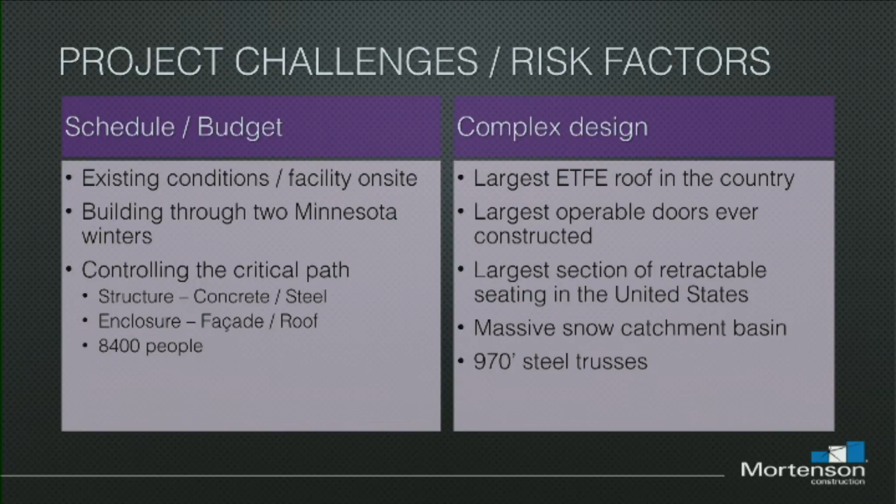And so I'll walk you through a project that was completed just recently, the U.S. Bank Stadium, which is where the Vikings, the Minnesota Vikings, play.

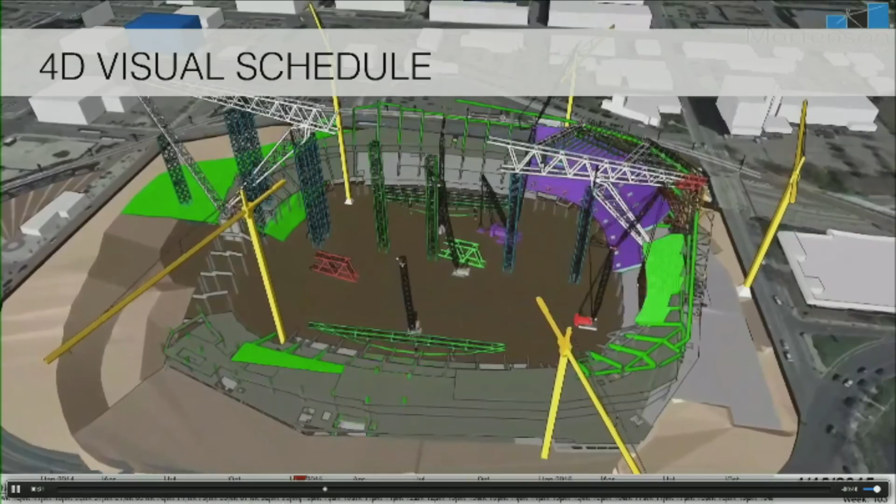Using the tools we've talked about before, but now directly as a contractor, we look at how to integrate the planning of the project more visually, tying the schedules and construction activities together as effectively as possible. All the components come together - the cranes, the locations, all of the madness of the construction site - can be critically analyzed and organized effectively so we can simulate the building of the project.

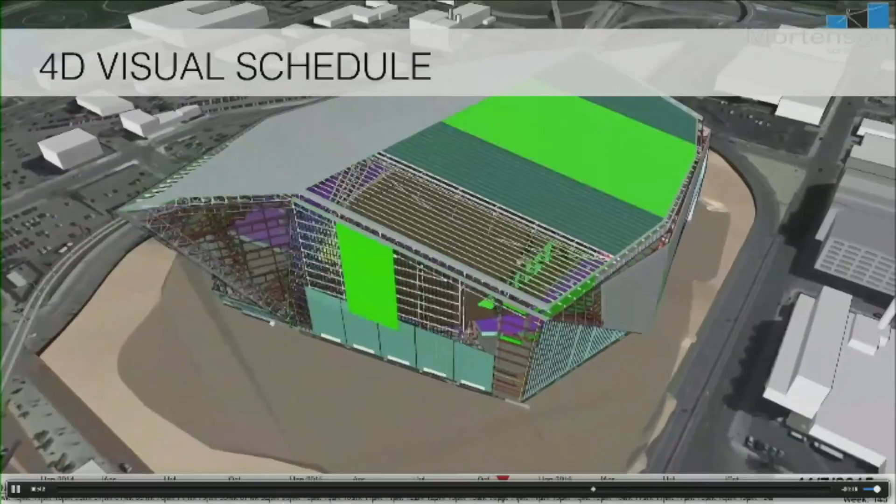And then tying that to the superintendent activities. These things are not separate - the superintendent isn't doing something over there while the VDC guys are doing something over here. Those things are actually informing each other.

What you see here is our superintendent, Dave Mansell, on the right - very experienced, probably one of the most famous, infamous Mortensen superintendents. A great planner, executor, driver of resolution, but a big believer in VDC. What you're seeing here is one of these huddle sessions where he's bringing in all the trades, and basically they're planning according to that visual you saw. They begin to sequence the work that's going to be done day-to-day.

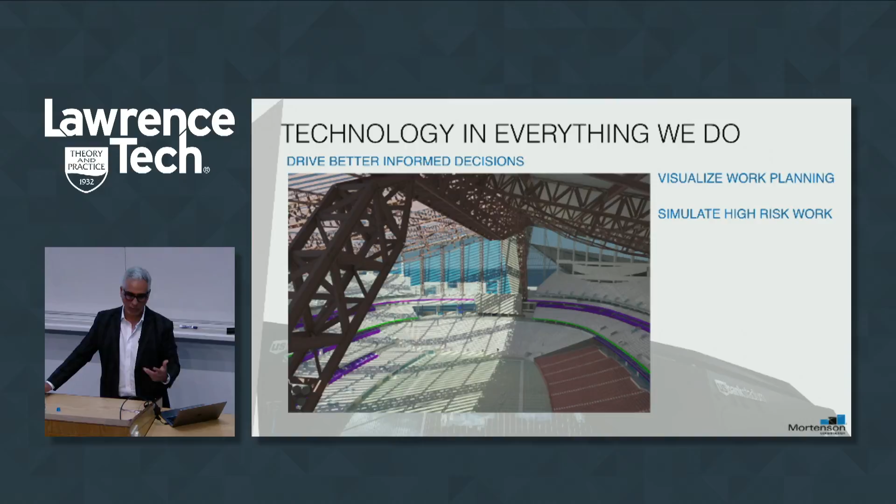Lots of tech, but one team, one plan - that's always the objective: how to bring all of these stakeholders and processes into one workflow, so we can drive better informed decisions, visualize the work, simulate all the high-risk areas, and bring a higher level of resolution and integration into the process. For me, having joined Mortensen after all my experience before, it was a natural fit.

These guys have been doing VDC since the day of the Disney Concert Hall. Mortensen Construction was actually the contractor that built the Disney Concert Hall. What was interesting is that as we were asking the same questions as an architect in the beginning, in terms of new tools and new processes from a design standpoint, Mortensen was doing the same thing as a contractor. And the convergence of those two ideas came together in the Concert Hall.

These two groups basically paralleled each other and became the leaders in the industry in terms of virtual design and construction. So for me, it's been really great to almost come full circle, joining Mortensen and bringing all of these ideas together, so that we can begin to think about what the future is going to hold.

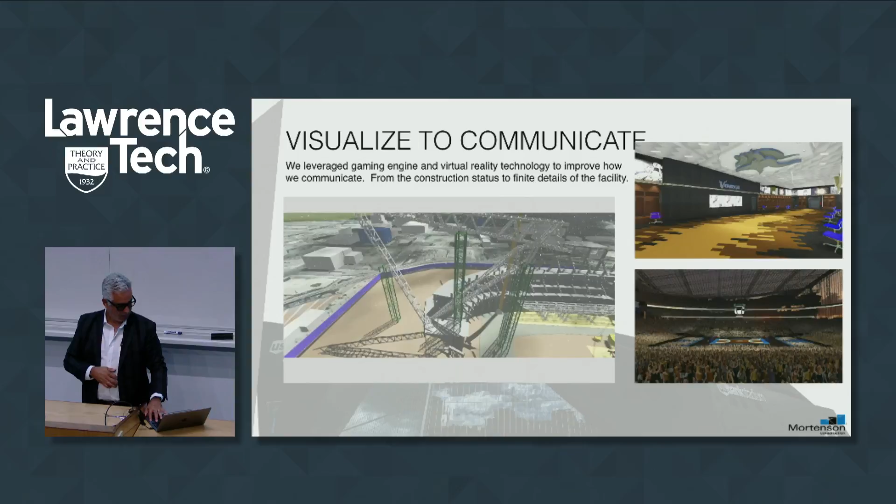I want to share this video with you guys. That's Dave Manzel - where do you start?

You have to start with a plan. We hear that - more time planning, which equates to less time building. We utilize the most advanced tools in the industry, implement lean planning strategies, leverage our sports expertise, and hire the best people.

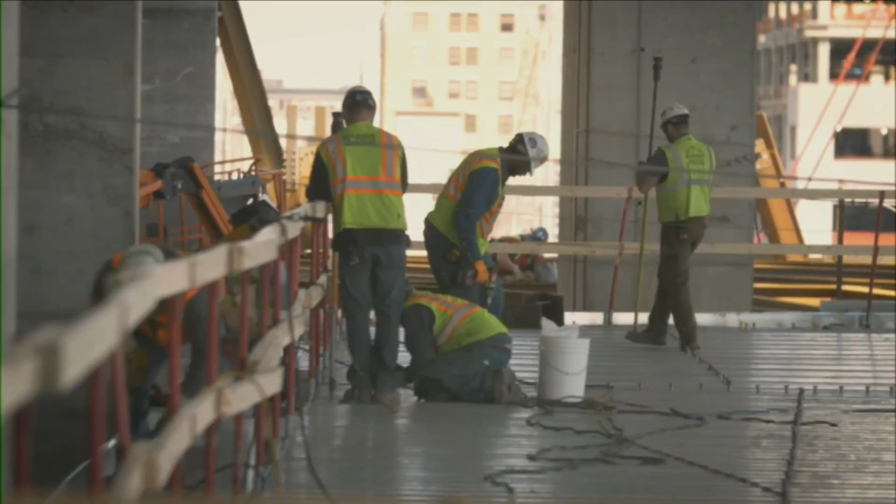Mortenson, with the technology they have and the way they're able to show the job as it's going, makes it easier for every sub. You have a plan, and it's a pretty set plan. It makes everybody's job much easier. The job gets done in time, people are safe. With the planning so far in advance - a year in advance - we're able to plan for overhead, equipment, and everything else based on using that technology.

Created by adding the element of time to a 3D model, the 4D model allows us to simulate hundreds of solutions and optimize the plan to create the best plan. It helps us visually communicate our plan to our trade partners and better collaborate and execute that plan.

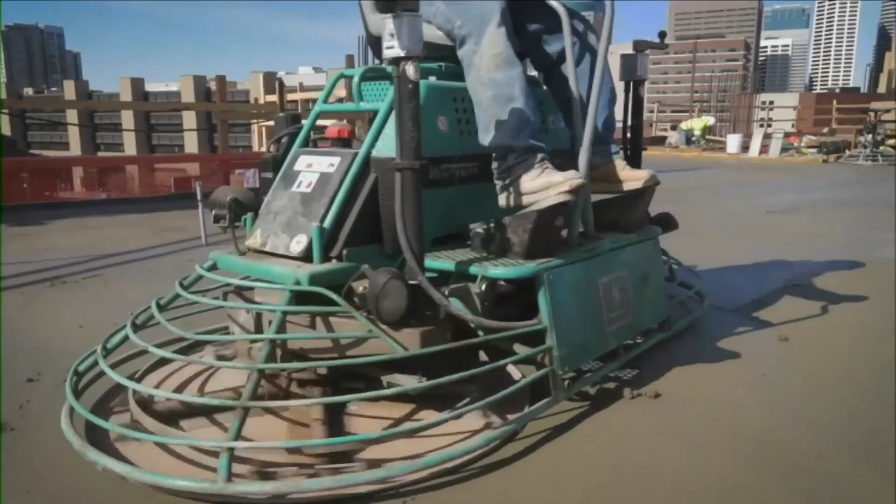The amount of technology used on this project, down to the day on every task, is quite the process and done very well. Having up-to-date drawings at everybody's fingertips was very important, and it was very easy with the technology used, from the submittal exchange even to the punch list. Everything was digitalized and easy to pass along. With all the different trades, it could be very easy to get documents lost. They did a very good job with all the technology available to maximize that process.

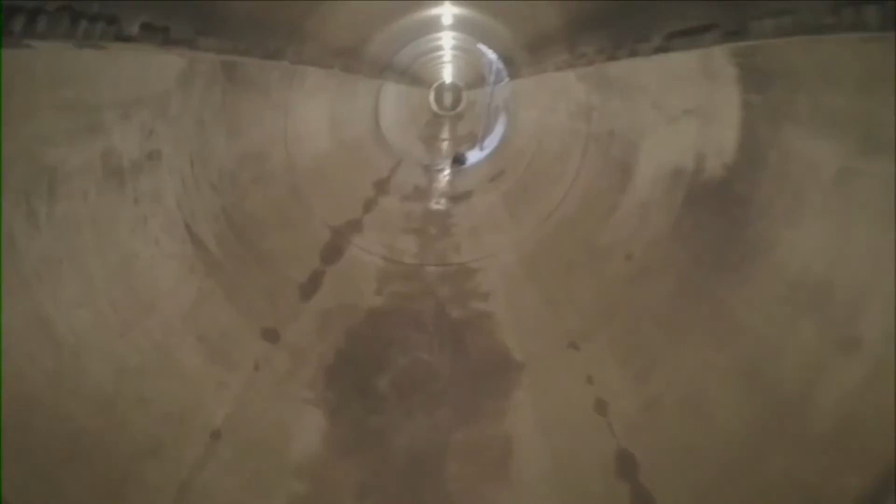Without 4D technology, construction would have taken a lot longer. Costs would have been accelerated. Mortenson had committed to using personnel who were familiar with this technology, and we ended up having the building before we even anticipated getting it.

Virtual reality technology gives us and our customers the ability to visualize completed spaces before any construction has begun. This is a critical tool to make informed decisions while saving time and money and creating the best possible solution.

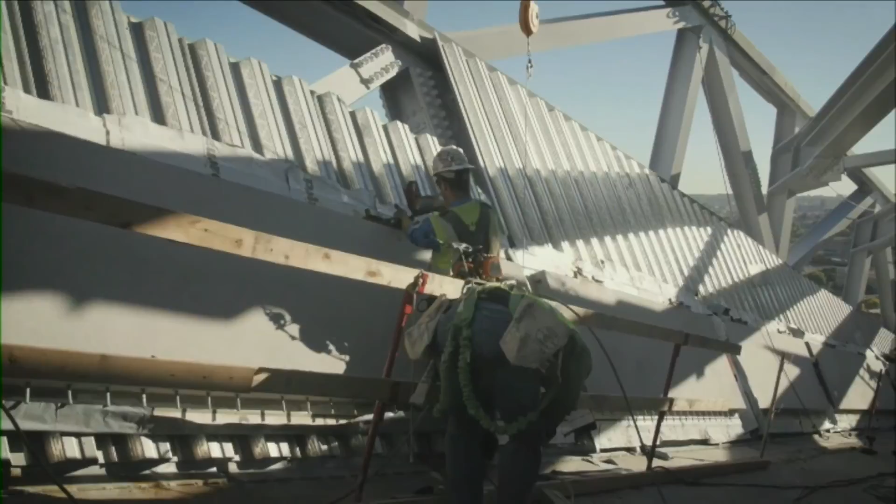In addition, lean construction and quality prefabrication materials advance the schedule more so than traditional building practices. Our ability to identify opportunities to prefabricate materials and produce project components off-site delivers this project faster and with the high quality we require. These tools, in conjunction with a comprehensive plan, are the reasons we were able to build the U.S. Bank Stadium in a way that delivered the best value for taxpayers and the Vikings, while creating an iconic building resulting in early and under budget completion.